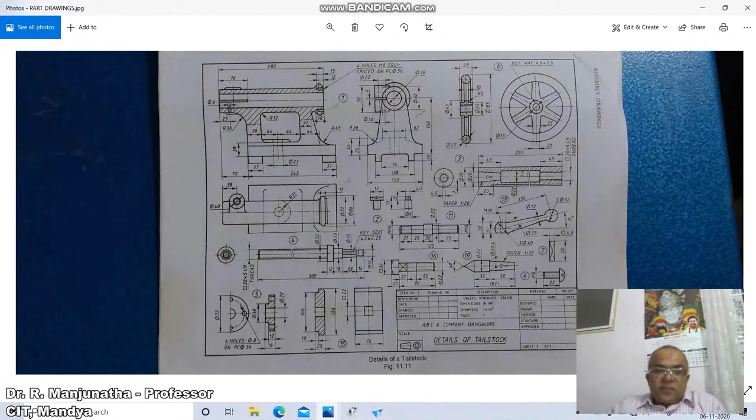To this, what happens is, now we can see there is a hole inside of diameter 38. So this diameter 38, we can see there is a barrel, and that barrel has to go inside this, which is 38.

Then to this we have a square of 20 into 5 LH thread. Similarly there is a square of 20 into 5 LH thread, so this will go inside this. Till where it will go, that is the next part what we need to identify.

So to do that, first we will be having this diameter 38. So this diameter 38, we have a flange of diameter 38. So this portion, this diameter 38 will go and fix into the model of this body. So first we are going to take up the body and we are going to assemble it now.

First I will go to new, so I'll go to isometric assembly. Once we go for the isometric assembly, now we need to place the part here. First we need to get this part here. So now there is a part, we need to fix it.

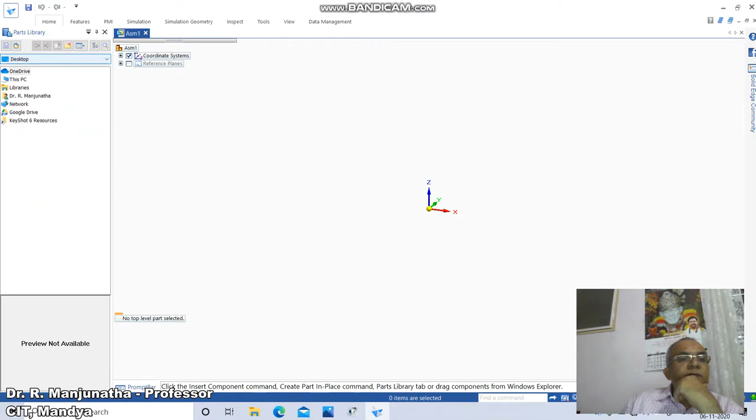First we will go to E drive where I have saved this file. I will go to the tailstock, double click on this. Now we will have the parts here, so these parts have to be fixed here.

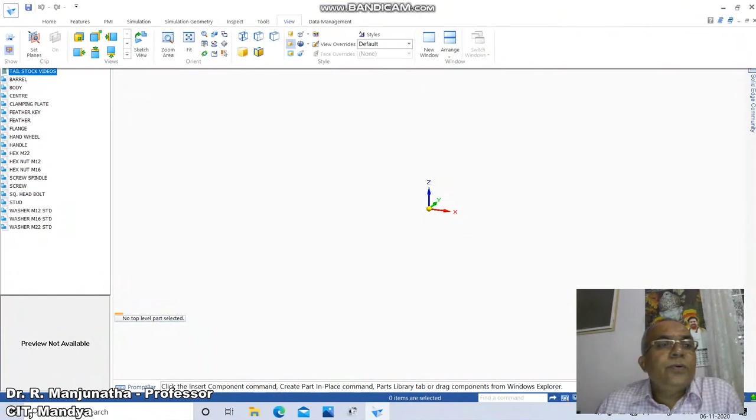So to do this, first we'll go for, now we go for the body. You just double click on this. So the body part will come and fix it here.

So to this I need to assemble. So when you see this body, to this we need to have this part number 5, which is the flange. So that flange has to be fixed now. How do I come to know that it is to be the flange?

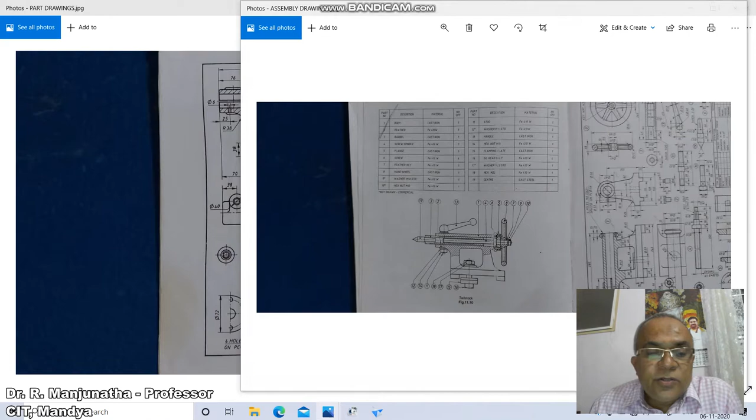You can see here, there is a diameter 38. You can see the diameter 38, so this diameter is also 38, so this portion has to go inside this. But we have the diameter 20, the diameter 20 has to go inside this.

So the barrel or the screw spindle has to be inserted here. So this thickness is 18, and this thickness is also 18. So this is how we will be able to analyze from which part to which part we need to enter.

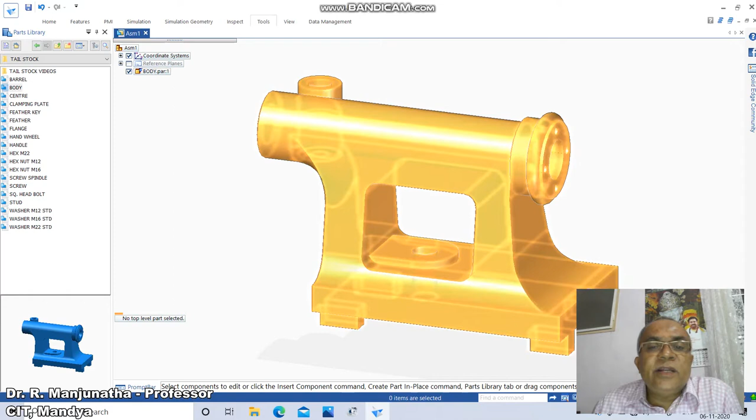So the first part, once we're done with this, will be automatically grounded. It is fully constrained in all directions, so we cannot change this particular base part. Now we want to have the flange.

So you just double click on flange, so this flange will come here. Then you just go to home, click on drag component and say okay. If you try to move this, it moves in all directions.

Now what I need to do is align this with reference to this. So go to assemble, go to home, click on assemble. Here we need to create the feature. Since it is round, you just lock the rotation and click on the axis of this with the axis of this.

Now initially it was moving all around. Now when you try to drag this component and say okay, now it moves only in this direction. That is basically because now it is constrained in all the directions except that it is moving in the linear direction.

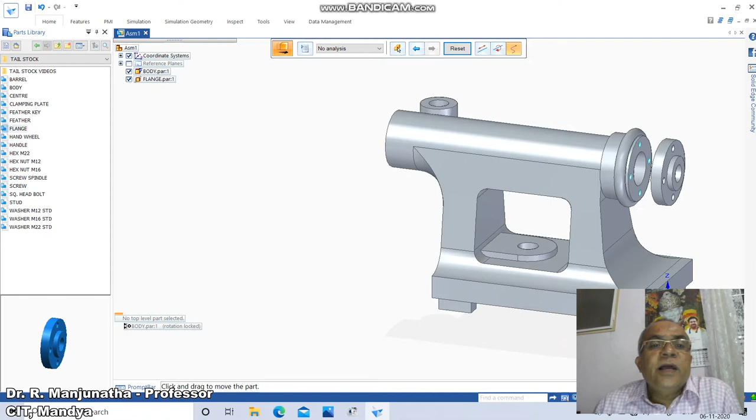So what I need is I want this face to be matched with this. Go to assemble, go to home, click on assemble, click on this face, has to be touched with this face. Now it has gone inside this, but now I need to flip this. So automatically it will rotate, mirror with reference to this, and make that component fixed now.

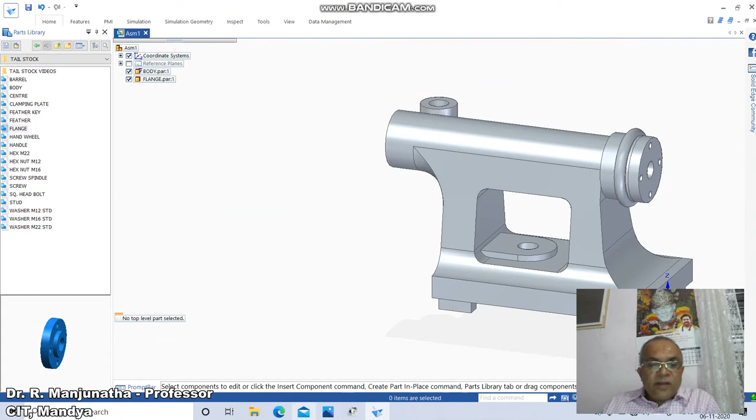Now when you see this, if you go to home and try to select this flange, it says fully positioned. Once you get this, for the next part I need to assemble, each part has to get to the fully positioned condition. So to do that, now we will go for the next part.

The next part what I need to assemble is the screw spindle. How do I know that? We have this diameter 20, and this diameter 20 has to be assembled within this flange.

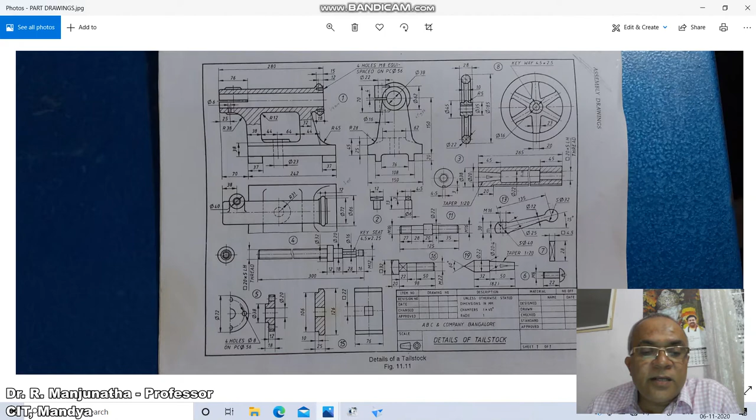So this is also diameter 20, and this portion, that is 18, this is the end of this portion, has to be butted against this. So that is how it should be assembled. Now I have to take the part number 4, which is the screw spindle.

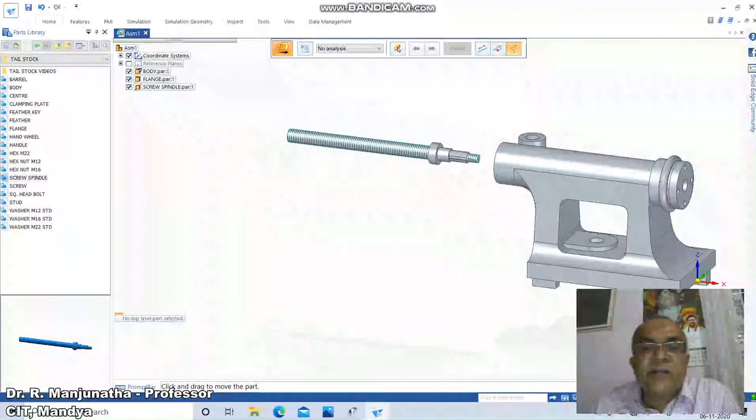So to do that, first you double click on the screw spindle. Now when we drag this, go to home, click on drag component. If you click on OK, it moves in all directions. Now I need to assemble this.

So I will not lock the rotation, but basically because we have a keyway here. Once you have a keyway, the keyway has to be horizontal, so it can be rotated in any direction. That is the reason why I cannot lock the rotation even though it is a round piece.

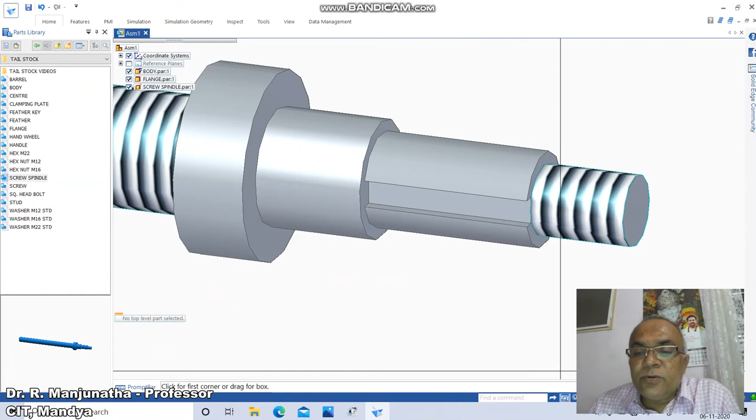So to do that, first go to home, click on assemble. I don't lock the rotation. Click on the axis of this with reference to the axis of this. Now as I move, go to home component and go to drag and say OK.

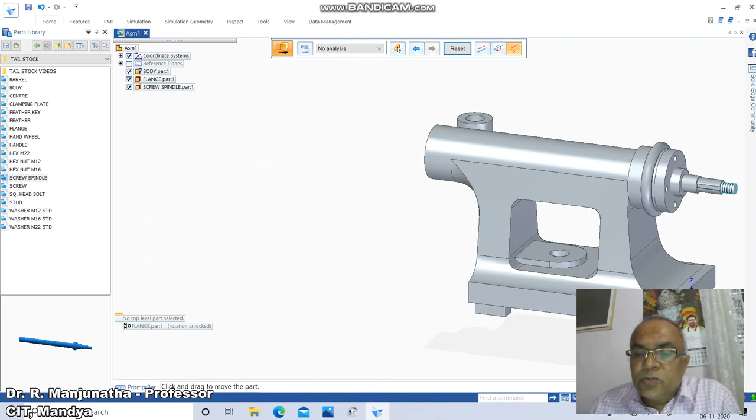It will move in all directions. Now you can see it is moving in all directions. Now I need to lock the rotation. Once we assemble this, you will lock the rotation.

To lock the rotation, you just click on home, click on assemble, take the flat portion of this with reference to the flat portion of any one of this flat portion. You can take the flat portion of this. If you take the flat portion of this, now it has been locked, the rotation.

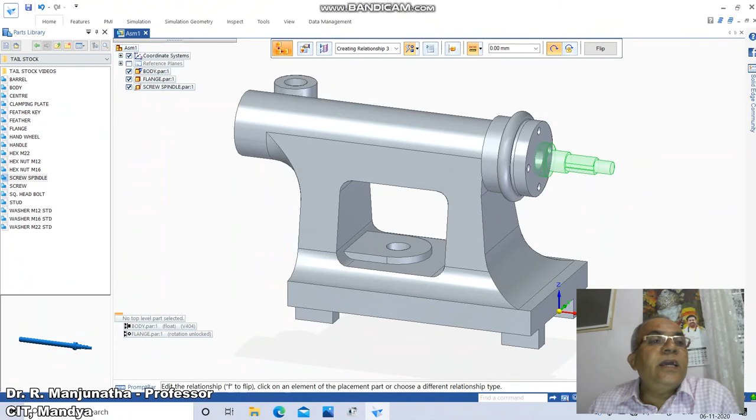Again, when you try to drag the component, we can see that the component is moving in the horizontal direction. Previously it was rotating, now it is not rotating, basically because it has been locked in rotation.

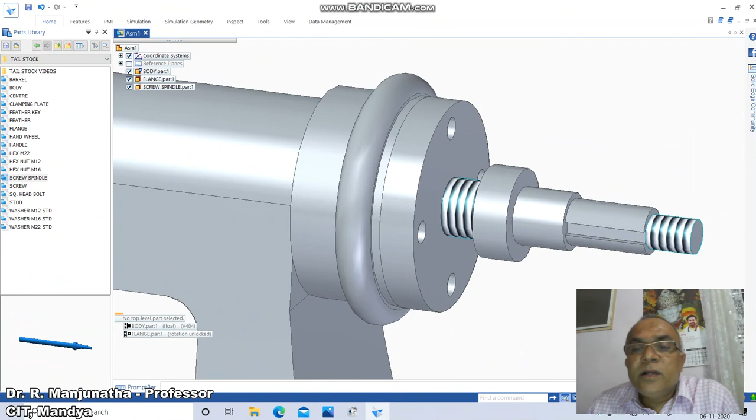Now the other part what I need to do is, go to home, click on assemble, click on this face, click on this face with reference to this. So it will go inside and it will lock the rotation.

So this is how they, now when it is seen, it is in fully positioned. So this is how you will be able to place the component.